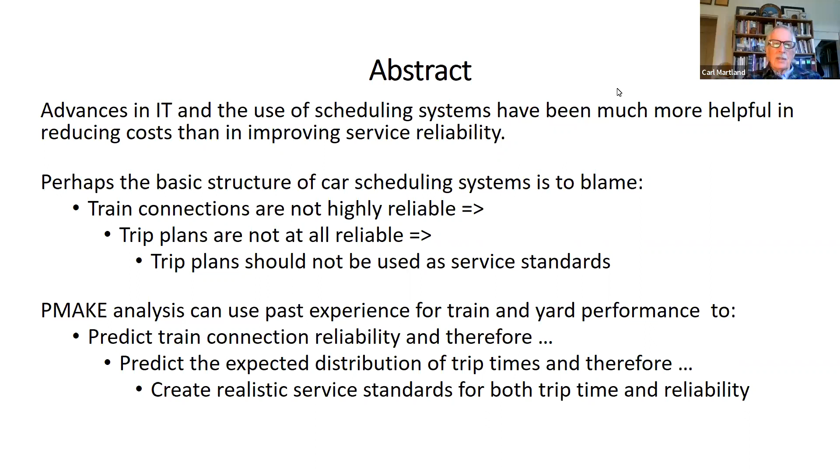We'll go through 4 pieces here. First, we'll look at what service was like. I participated in probably the 3 major studies of service reliability in the United States back in the early 70s, the early 90s, and about 15 years ago. And I'll talk about the evolution of freight car scheduling.

When I started as a grad student more than 50 years ago, railroads were just implementing terminal management information systems. And as soon as they were there, people started to think about freight car scheduling. So freight car scheduling started in the early 70s.

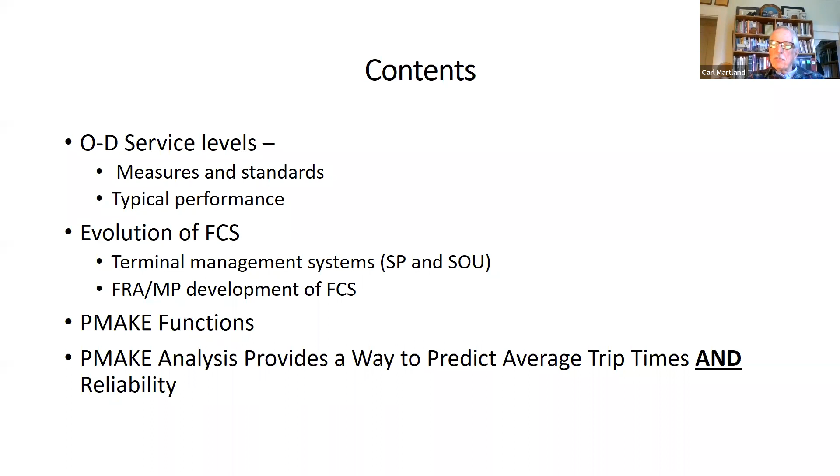I started thinking probabilistic analysis at the same time. And what I will show throughout this talk is that the PMAKE analysis provides a better way to predict service levels in structure operations. Next.

So let's see, what was service? Now it's interesting, back when the freight car utilization program began in 1975, that was a US government, Federal Railroad Administration program that involved the Association of American Railroads and several shippers, including General Mills. General Mills and a couple other companies provided full-time manpower to work on this research program, which lasted about 7 or 8 years, multiple phases.

But at the beginning, one question was, well, how reliable is service? And the railroads didn't have the information because most service was interline. So General Mills provided some trip time distributions, and the average trip time was 6 days. They actually had a standard for each trip, 5.3 days, and they measured performance relative to standard. And on time or early was 61%, no more than 1 day late was 78%.

What does that look like? That's the next slide.

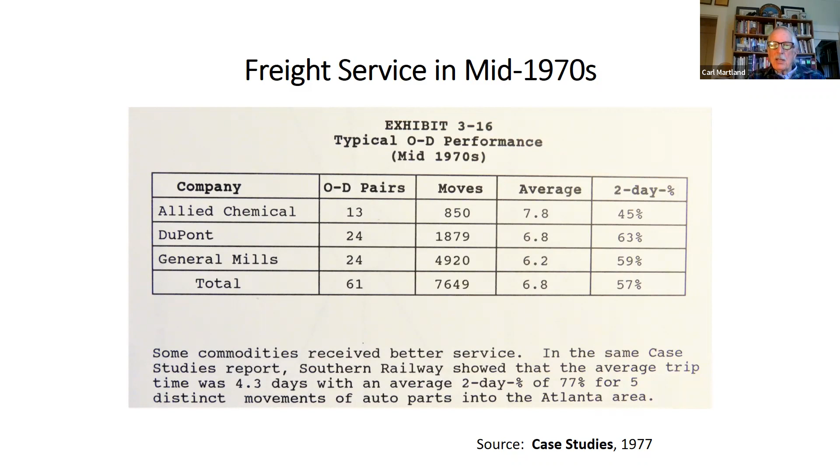This shows the General Mills along with DuPont and Allied Chemical, which had similar experience. You know, the typical move was a week or so, and the average 2-day percent is like taking that distribution and taking the best 2 days and adding them together. So that was like 50 or 60%. In some cases it was better, but that's where we're starting. Next.

So the conclusion at that time was that the service in the early 2000s was similar to what it had been throughout the previous decades. Service has been a problem for a long time and still a problem then. Next slide, please. So that was kind of the depiction of what service actually is. Now we'll talk about freight car scheduling. How did this get started? Next.

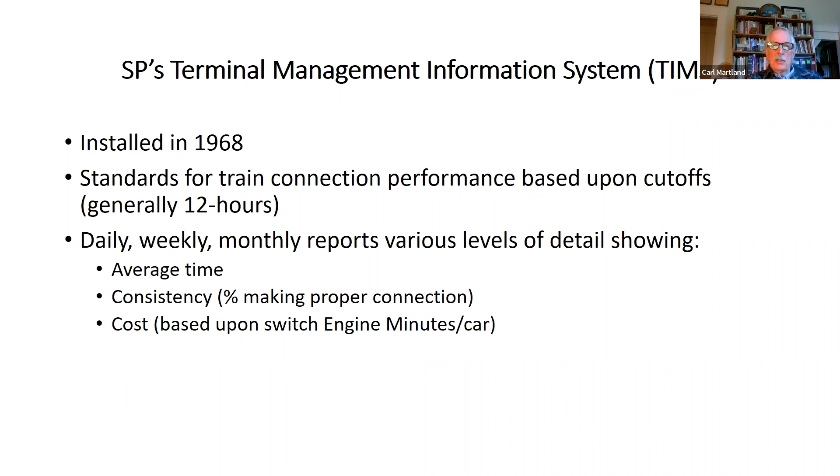Now, I've got a lot of quotes in here because I think they might be interesting to read for anybody that's working on car scheduling type systems or trying to predict trip times and reliability. So Southern Pacific had the ability in the early 1970s to develop trip plans, but they didn't do it. They chose not to. They were working on exception reports so they could find the cars that were late.

And this is from the Missouri Pacific's Computerized Freight Scheduling System State-of-the-Art Survey, 1977, which is an interesting document. It includes 2 or 3 page statements with a lot of exhibits about what each railroad was doing related to information systems for service planning, service design. So Southern Pacific had the ability in their IT department to do car scheduling, but as shown on the next slide, they chose not to do it.

The operating officer said, you just can't tell them what cars should be on a train. You have to have something to help them manage what's going on in the yard. And I remember in the 80s, we referred to this after a meeting such as a RAS meeting or one of the other professional meetings. We'd sit there, and after 1 or 2 beers, you might complain about some CEO having service by fiat, without any consideration of how to do it, just say it shall be done. So SP in the early 70s said, no, we do not want to go with car scheduling. Next.

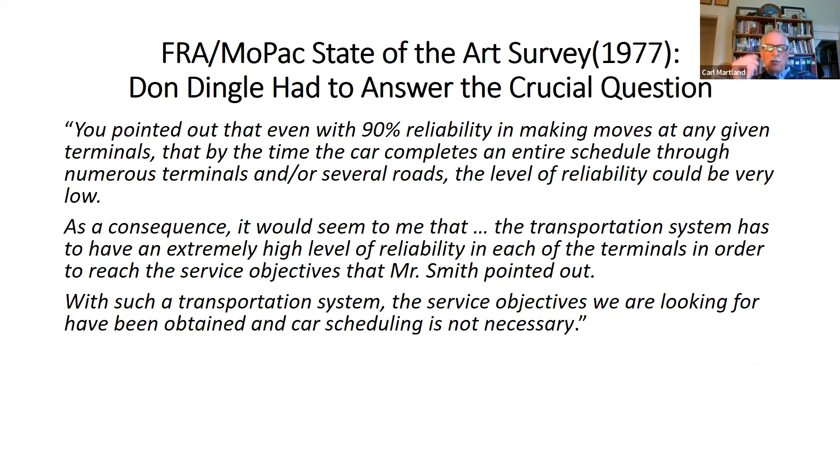So Don Dingle, while the next screen is coming up, is thinking, how am I going to respond to this? And what he says is, well, you know, good service needs good plans, blah, blah, blah. Well, car scheduling will find problems. You know, we'll fix it. Now, when I go back and read this after 35 years, I realize that both the questioner and the responder, Don Dingle, both accept the idea, not a fact, the idea that the trip plan generates a standard.

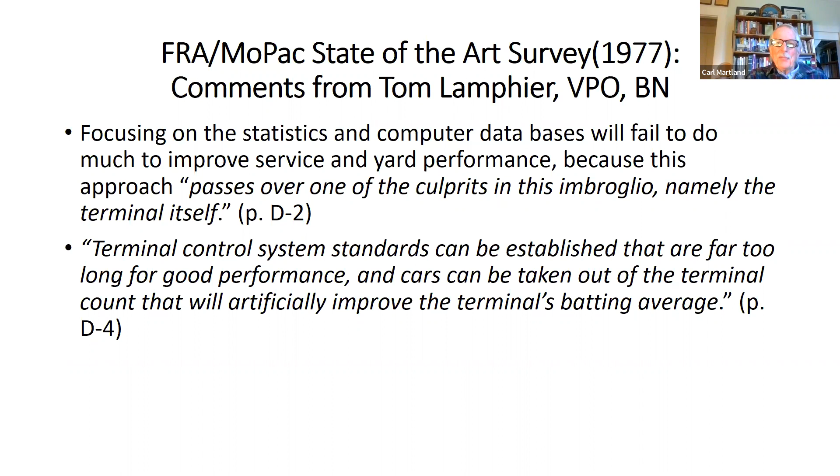And unfortunately, Lamphier was correct. Now, I put this in based on my memory from, say, is my memory right? That was 20 years ago I'm talking about. Right car, right train was one of the many acronyms that was developed for the chief railroad presidents and others to talk about how they were having a new plan to improve service. But to get a respectable batting average, a respectable consistency, cutoffs grew from a reasonable 8 or 10 hours to 15 or 20.

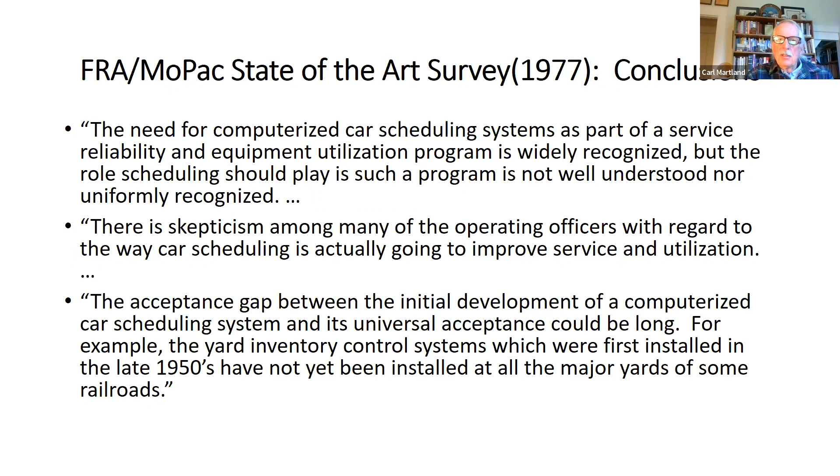So this is basically concluding that there is capability, but skepticism, and it could take a long time to implement car scheduling. Next slide. In 1981, a few years later, there was a final report from that same FRA study that concluded that at 7 Missouri Pacific class yards, things had improved. The greatest improvement was at Fort Worth, where compliance with the trip plan, the train connection standard, was about 20%. Next slide.

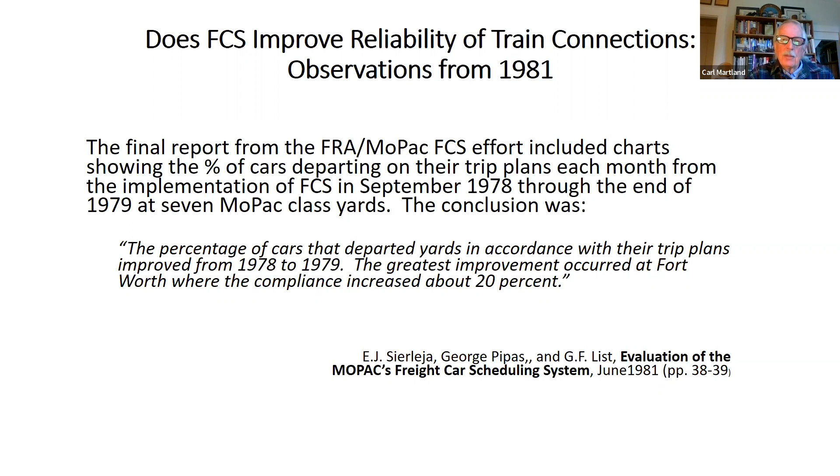But of the yards they looked at, the one they cited was the best one. Only one yard had connection reliability for the whole period that was near 90%. At North Little Rock, a major hump yard, they never got above 75%. Now, in actual fact, 75% compliance with train connections is not bad if the cutoffs are reasonable, but it sure makes it look very bad for car scheduling. Next.

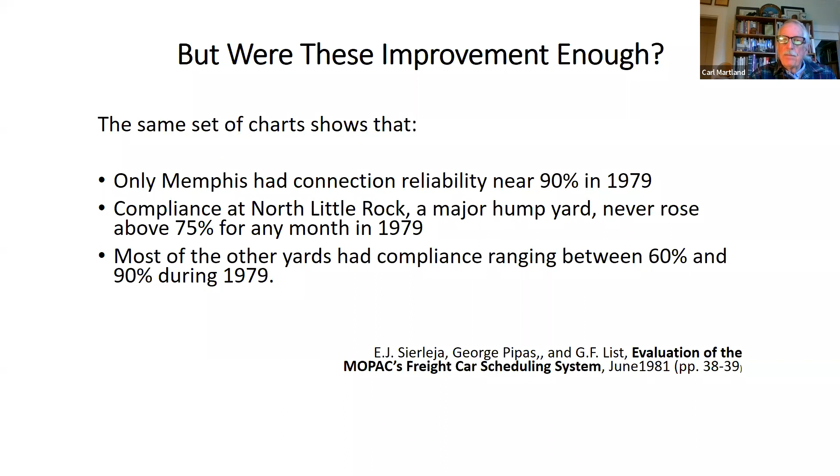I've got a series of comments in here that I came across from my own notes to meetings on interline service management in 1991. At that time, the railroads still did not have measures of origin to destination performance for their interline shipments. The customers had it, the railroads didn't. But some of these comments, and these are from my written notes during the meeting, the official minutes of the meeting didn't have these rather blunt statements. So Mark Becker, Burlington Northern: we didn't get any consistency improvements.

Conrail: customers are concerned with a lot of things. Where we're not coming forward is with notification of delays, which is a major feature of car scheduling. And he said the marketing people quote performance. They sell the service based upon past performance, including the disruptions caused by weekends. And then John Ladd from Union Pacific says, I structure service to be 60 to 90%. I'll put in a buffer of 24 hours to cover the possibility of a misconnection. Very logical. Next.

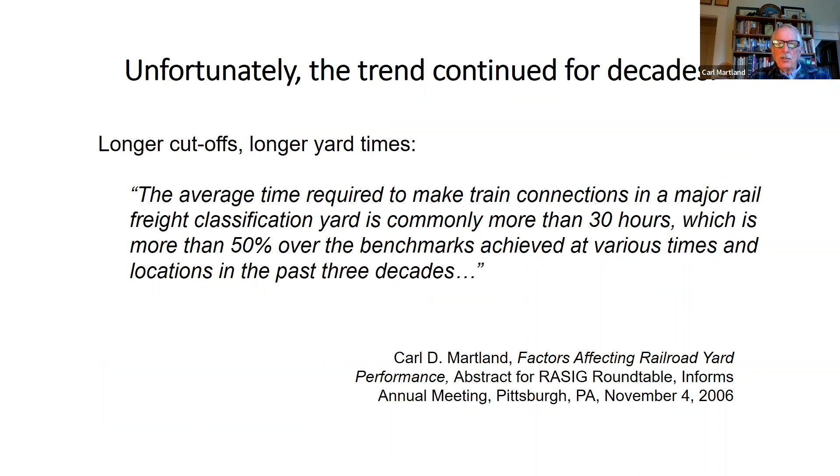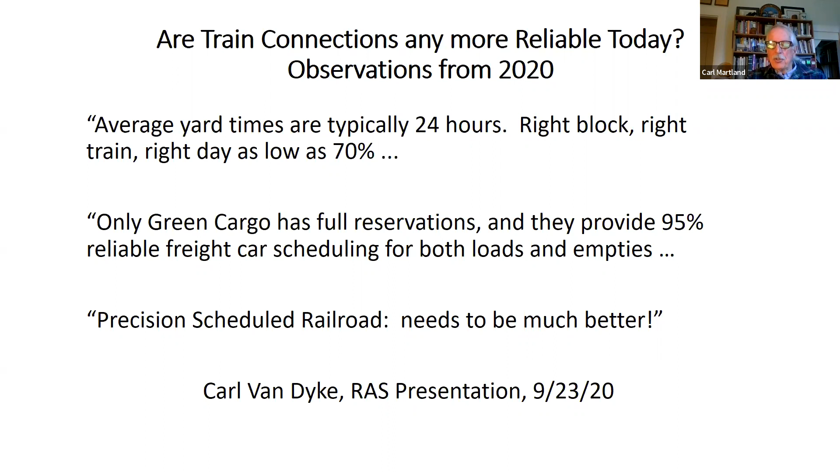September 23rd, 2020, I sat in on one of the, I guess it was the RAS presentation number 6 or something. And Carl Van Dyke was speaking. Carl Van Dyke, I supervised his thesis, and he went on to fame and fortune with models of the type that we're discussing today. And a couple of years ago, he said average yard times are typically 24 hours. Right block, right train connection performance is about 70%. So I assume that service and train connection performance is no better today than it was 20 years ago or 35 or 40 years ago. Next.

So let's go to PMAKE functions. I don't know if people have heard of this at all. I'll try to just give a quick introduction. Next slide. And I've used some of the original graphs back when we had to draw them by hand to put into a report.

This shows a simple PMAKE function, probability of making a connection. If there's too little time between the inbound arrival and outbound departure, you don't make the connection. If there's plenty of time, you still might not make the connection because there's not room on the train and various other factors. But you have that typical S-shaped curve. If you're an operations researcher, you immediately start thinking about a logit function or some kind of interesting but complicated mathematical expression. Next.

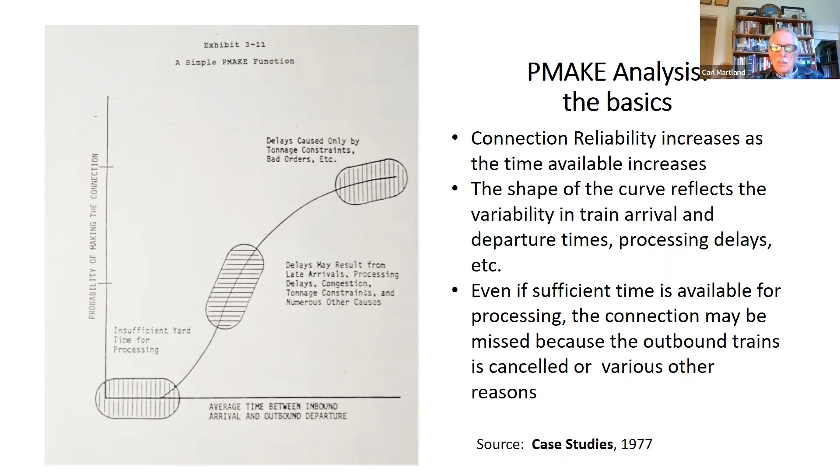This chart from that same report in 1977, Southern Pacific's TIM system, the terminal performance management system, showed percentage of cars making their connection, and it also had the available yard time. So this chart, I simply plotted all those connections, and then I drew a line and said, it's not a calibrated PMAKE function. That's just suggesting a standard that SP could use for connection performance.

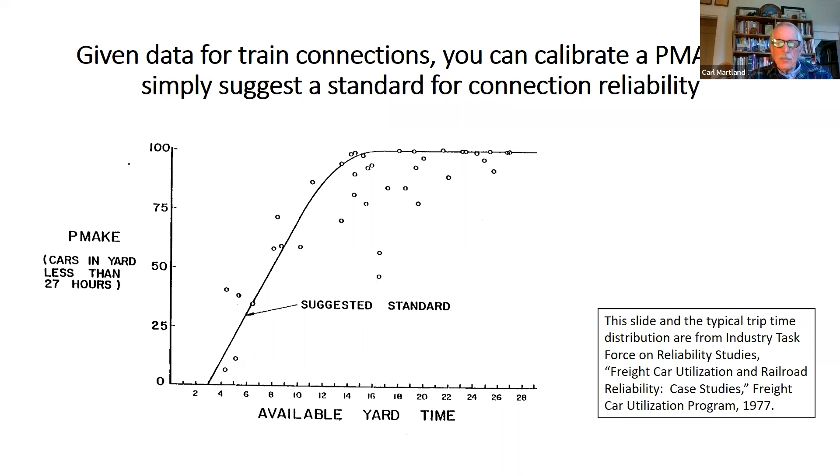So if your available yard time was less than 15 hours, the suggested standard would be somewhere between 0% and 95% or so. Next slide. I was going to put a logit function on this slide, but I didn't have the time or interest to actually put all those Greek symbols in there.

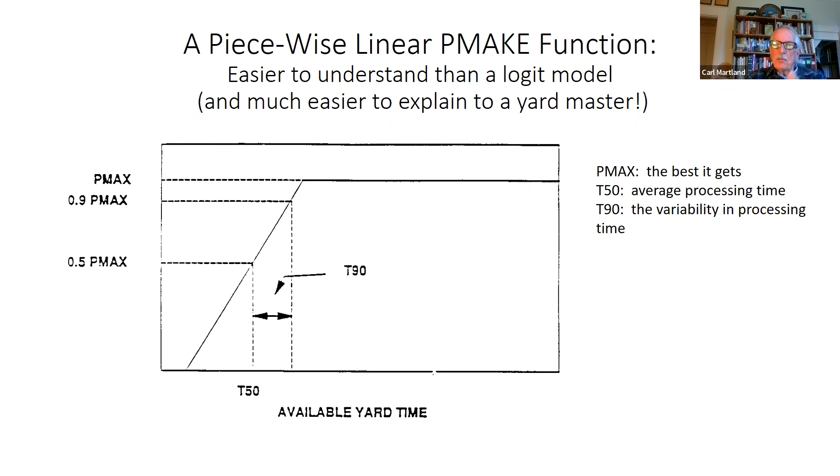And what we concluded was a piecewise linear function would work fine, and you could have these three parameters. T50, which turns out to be sort of like the average processing time, and Pmax, the maximum percentage you're going to get because a lot of trains are full, especially on peak days. Maybe your trains are full on Thursday, Friday and Saturday, and then you work off the backlog on Monday, Tuesday, and Wednesday. Next slide.

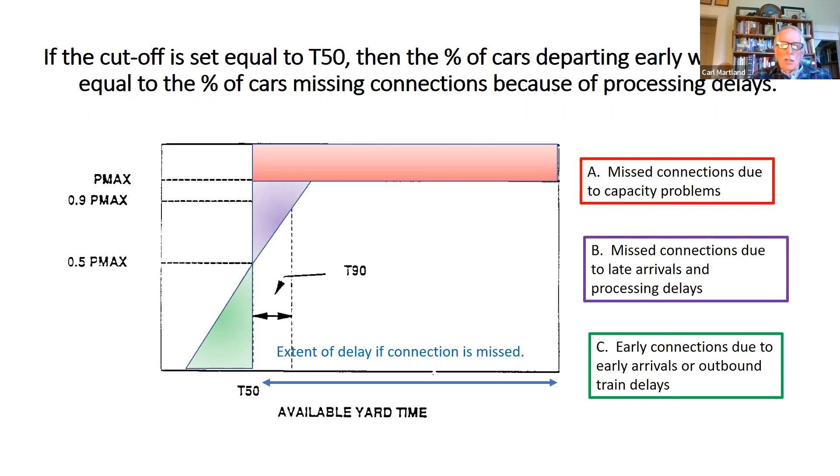So the question for trip planning is, well, what's the cutoff? In this green area, if the cutoff is really low, like 3 hours, most of the connections will be missed. If it's way up there past T50 plus T90, then you're going to get up to Pmax, which could be as high as 95 or 97%. And somewhere in between could be reasonable. Next slide.

That's just showing a different option of having like an 8 or 12 hour connection reliability. And that blue arrow is showing that the delay depends upon the frequency. Most freight trains would have a daily frequency, so that's like 24 hours. In some cases, it might be 12 hours, or there might be 2 or 3 possible trains with a shorter connection. Next slide.

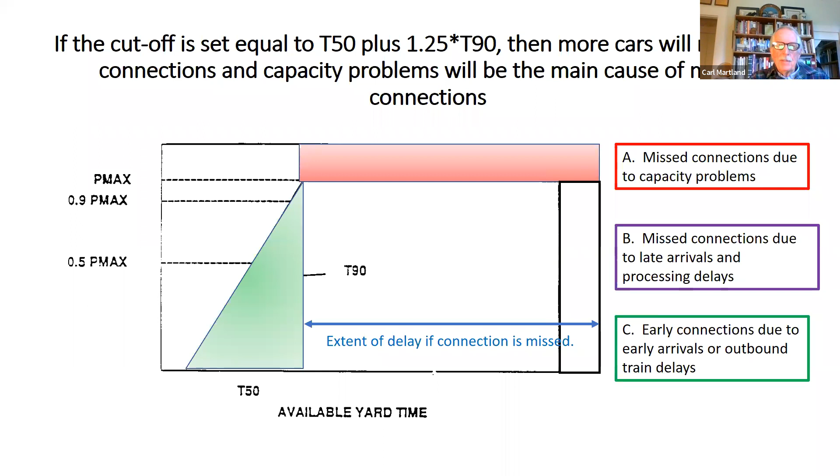So what I just went through said, let's look at train connection performance and come up with these functions. And then one day we had a case study down in the Macon Yard, Southern Railway in Georgia. And I remember we're talking to the terminal superintendent, a guy named Bob Reed, who had been a grad student at MIT working on processing time distributions for his thesis. And the idea of a process PMAKE function came to me.

And the idea here is illustrated by these distributions. This is from a student's thesis. He was comparing a hump yard in New England to one in France. And so the first distribution shows the actual train arrival time minus the scheduled arrival time. So it's taking the variability in arrival time, calling that kind of a process.

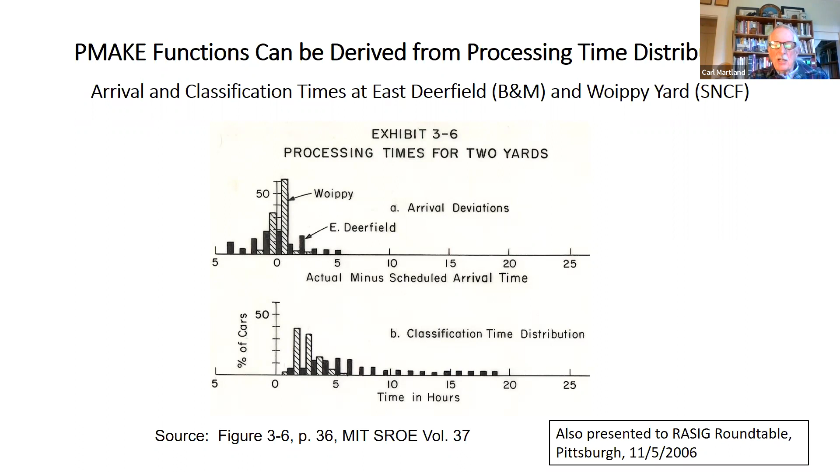Because trains at East Deerfield would arrive 3 or 4 hours early or depart 3 or 4 hours late. The French yard was a much more disciplined operation. They were operating freight in conjunction with passengers, and they had a great incentive to be more reliable than the US railroad. Classification distribution, 3, 4, 5, 6 hours, but sometimes longer. Next slide. This shows the assembly time and the departure deviation and the total processing time.

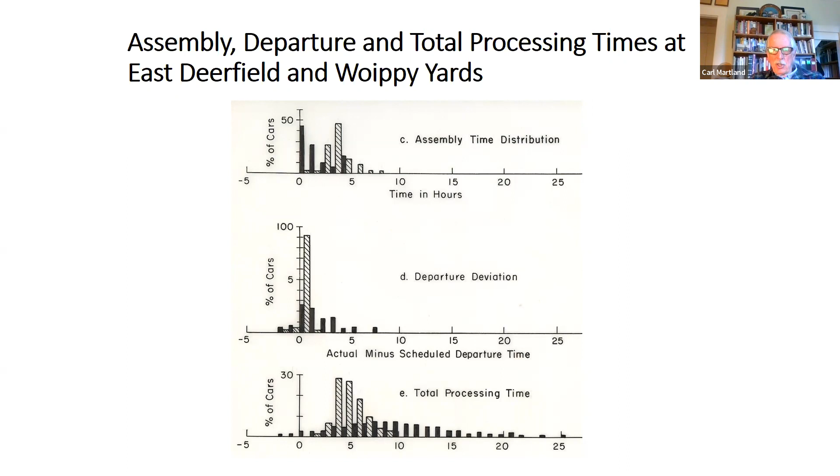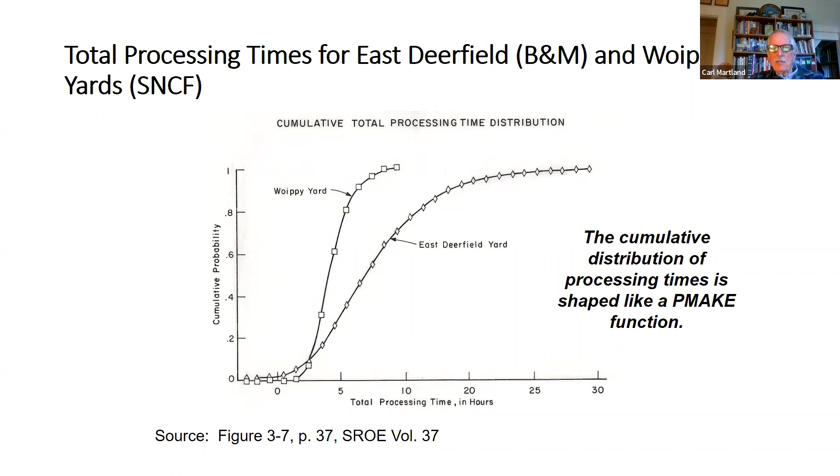So these are measures that can be obtained from any freight yard. Back when I first went there, the yard masters were doing this by paper and pencil on forms, and some railroads have had it automated. So you take the total processing time, and on the next slide, just show that as a cumulative processing time distribution. That looks like a PMAKE function. And the one for Woippy Yard is considerably better than the one for Deerfield. Next slide.

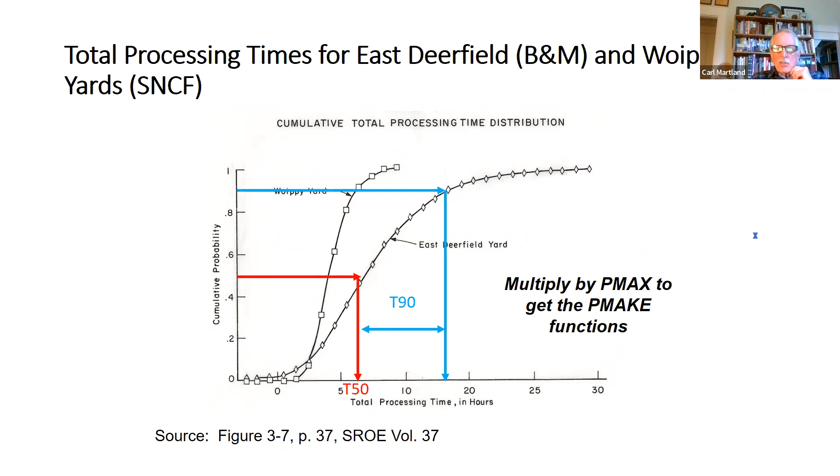So you could just linearize that and get your T50 and T90 that could be used to describe a PMAKE function. Next slide. These are just showing some of the PMAKE parameters that were done in a couple of yards. 3 studies. The first study was the Southern Railway in '72. That was when Southern was ranked one of the 5 best companies in the United States, not railroads, 5 best companies. And in fact, those PMAKE functions were the best I've ever seen as a group. They ran a lot of extra trains at that time, and they had pretty good service.

The Boston and Maine case study had more typical trip times. And then the Santa Fe case study was a time when there was tremendous congestion because of the Russian wheat deal, at a time when we were selling wheat to the Russians. And operation was chaotic. Next slide.

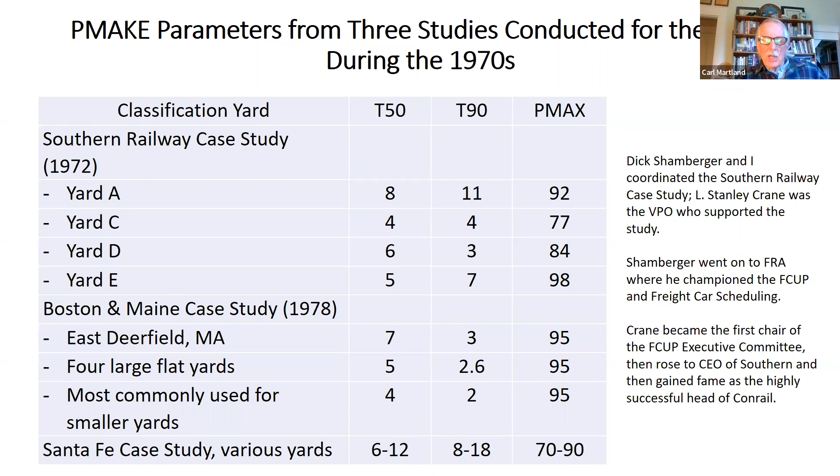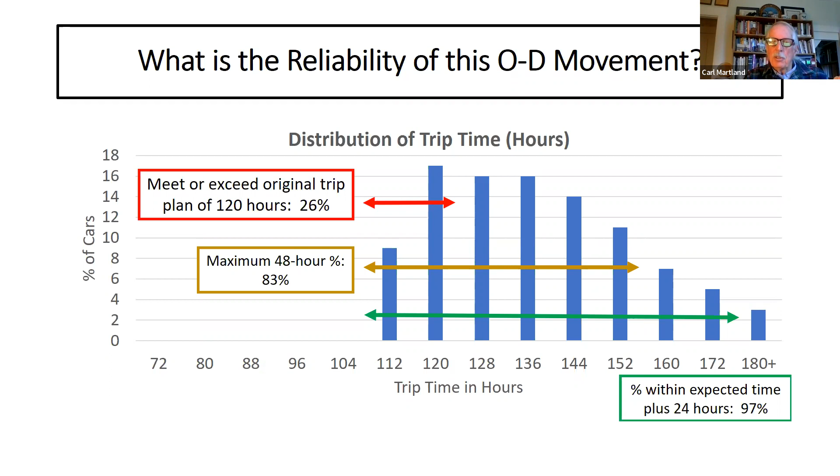So if you follow through all this, what you end up with is a consistent process for coming up with trip time distributions. So if you have a PMAKE function, you're relating train performance, yard classification performance, train assembly performance, availability of power for outbound trains. All those things are related to the PMAKE function that relates to the connection probabilities, that relates to the trip time distributions. And then the trip time distribution can be used to determine standards for trip times and reliability. Next slide.

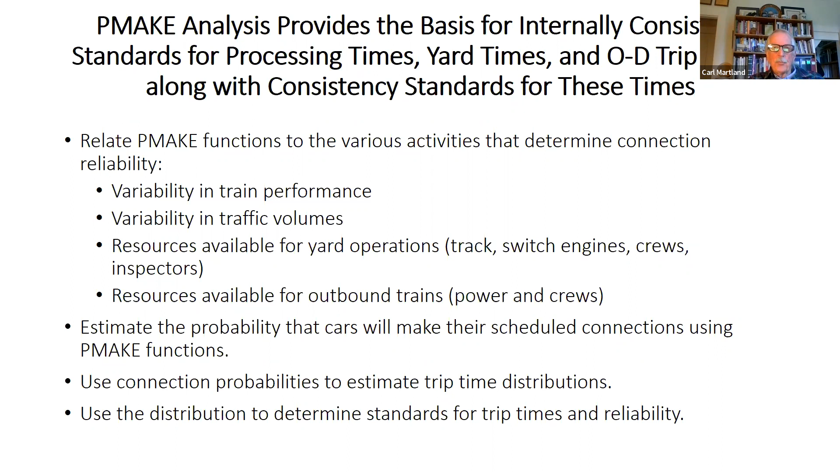And that's what we did with the service planning model. We used PMAKE functions to estimate the distributions. Boston and Maine was the first case study with this model, and they hired one of my students, Mike Messner. Andrew Jennings was a grad student with me. He worked there as a person who monitored service, and they actually had a consistent set of standards for a couple of years. In the early 80s, most of the major railroads in the US and Canada used the service planning model for some type of operations planning. Nobody went as far as Boston and Maine did, setting up the whole system, but they used it.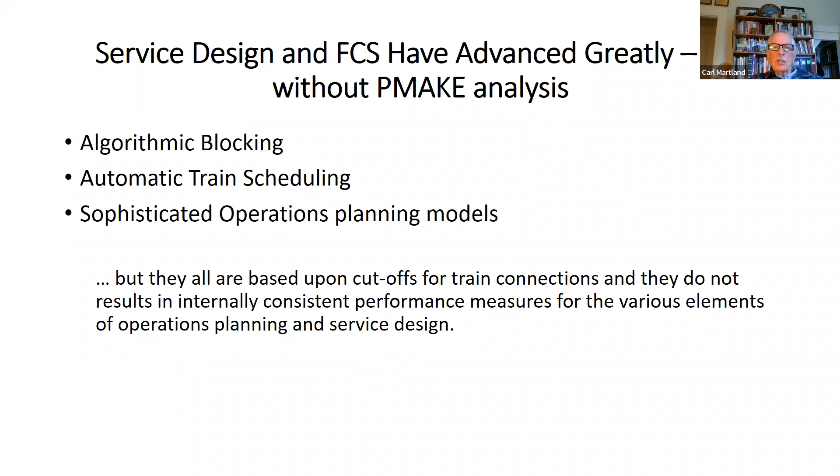Next slide. So summary. Why doesn't car scheduling work? And I did want to mention one article. Scheffer Lang was a professor at MIT who called me up when I was coming out of the Army and asked me if I wanted to work on rail freight service reliability.

I thought I was going to college to study urban planning, but urban planning didn't offer any money. So I said to Scheffer Lang, yeah, fine, great, I'll work for you. I didn't know then that he had been the first Federal Railroad administrator, and then he went on to the AAR, Association of American Railroads, in charge of special planning studies.

He wrote an article about 15, 20 years ago, Freight car scheduling, what's the point? His conclusion, after going through similar analysis to what I've gone through today, was you don't need freight car scheduling because the interest costs that were so high in the 70s and made inventory important aren't that important anymore, and freight car scheduling doesn't work because the connections are unreliable, blah, blah.

But he kind of, even then, accepted the notion that the trip plan equals a service commitment. So my only quarrel with him would be that the trip plan doesn't have to be the service commitment. The freight car scheduling advocates who were promising assembly line efficiency had oversold what was possible. That led to a whole history of railroad presidents overselling what is possible and continual disappointment in performance, rather than having a continuing process for improving operations or using statistical process control to figure out what's going on in the terminal.

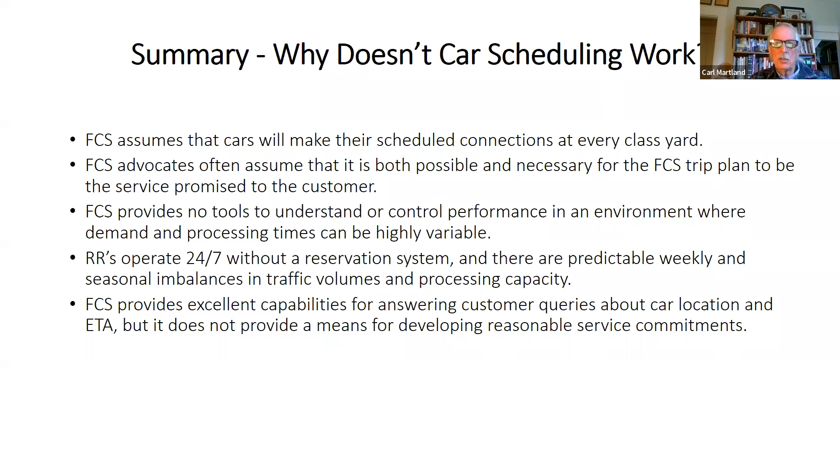Freight car scheduling provides excellent capabilities for answering queries about car location, but it doesn't provide a means for developing service commitments. The conclusions from the 70s are valid today. To deal with unreliability, you need to get into the yards. You need to understand how train reliability and the scheduling of switch engine crews and inspectors and the way you plan the use of the class tracks, all that relates to reliability. The PMAKE analysis is an analytical device that allows these measures at different levels to be consistent.

I haven't mentioned operating service plan until this point, but the operating service plan idea says that service comes from the operations plan. You don't design the operating plan to meet the service plan. You have an operating plan. What is a service that will provide? And if that's not acceptable, then you have to go in and change the plan, which might include schedules, resources, contingency plans, control systems, the whole thing.

I reviewed Hunter Harrison's book on, I don't know if he called it precision railroading, but that was one of his terms. And that's the kind of thing that he was advocating.